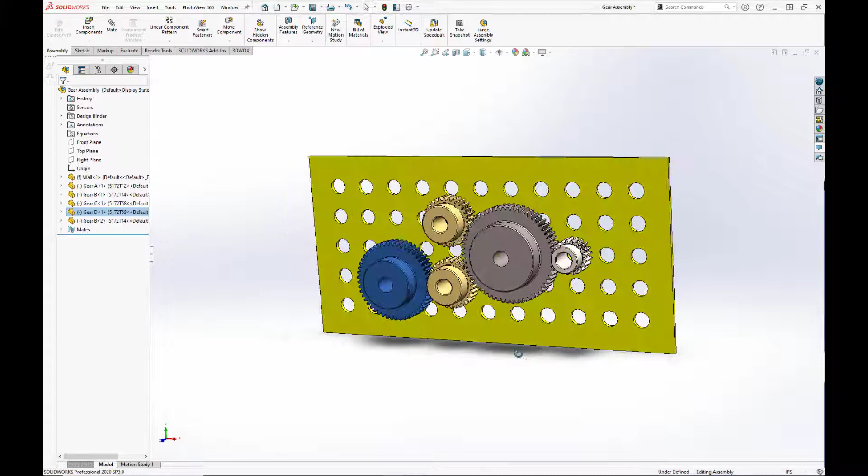The gear mate forces two components to rotate relative to one another, so if you spin one, the other will spin along with it. Here we have a set of 5 gears on a nice little pegboard. As I expand the mates folder, you'll see that the gears are all held in place with concentric and coincident mates.

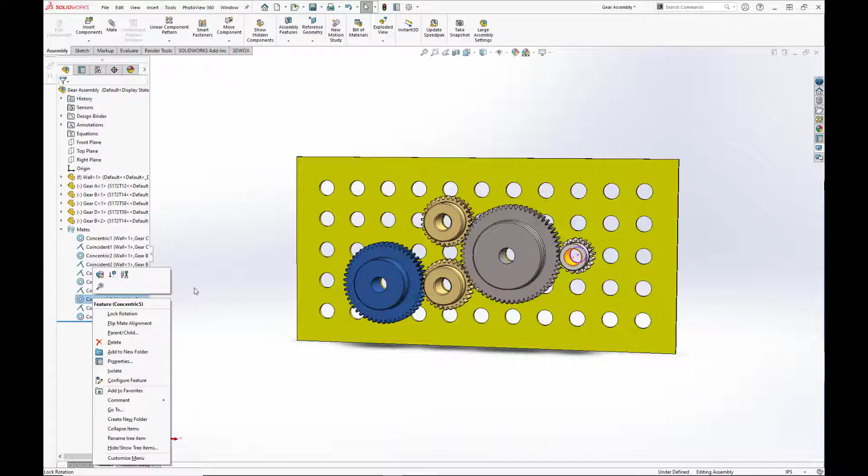Note that the concentric mates do not have locked rotation. This is important because if the rotation was locked, you would not be able to rotate it for the gear mate.

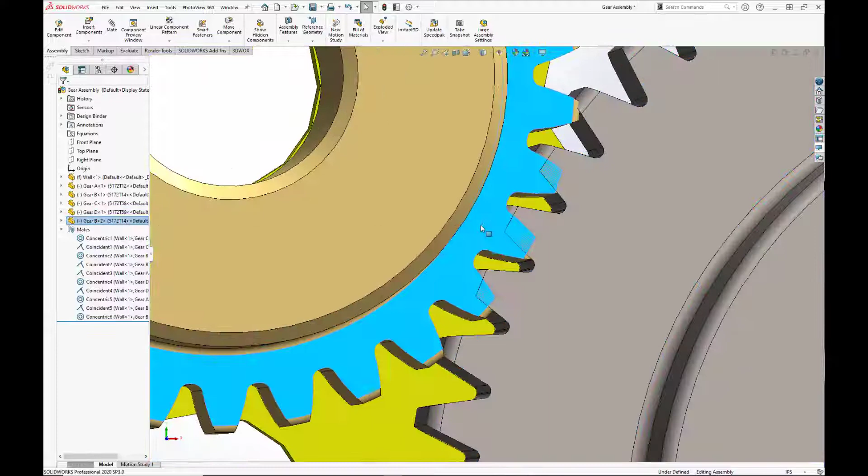The first thing you want to do when creating a gear mate is align the gear teeth to minimize interference. So we're going to go through here and just align these gears to the best of our ability without getting too crazy. And there we go. Okay.

To create a new gear mate, click on the mates icon, expand out the mechanical mates, clear the selection, and select the gear icon for the gear mate. Now select two surfaces that you want to rotate together. Since all of the gears have hubs, we'll select the hub outer diameter. You can also select the center through hole, or depending on how the gear was originally modeled, the outer edge.

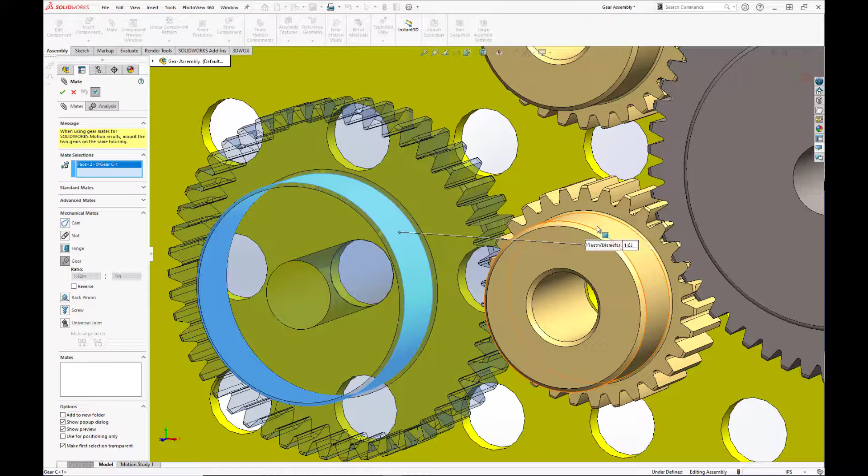So we'll select the outer diameter of the hub of this blue gear, gear C, and the hub diameter for this yellow gear B. Okay. Now you have to enter in the ratio. It's going to guess a ratio based on our hub selection, but we want to actually use the pitch diameter for the two gears. So for the blue gear, the pitch diameter is 2.5 inches, and for the yellow brass gear, it is 1.5.

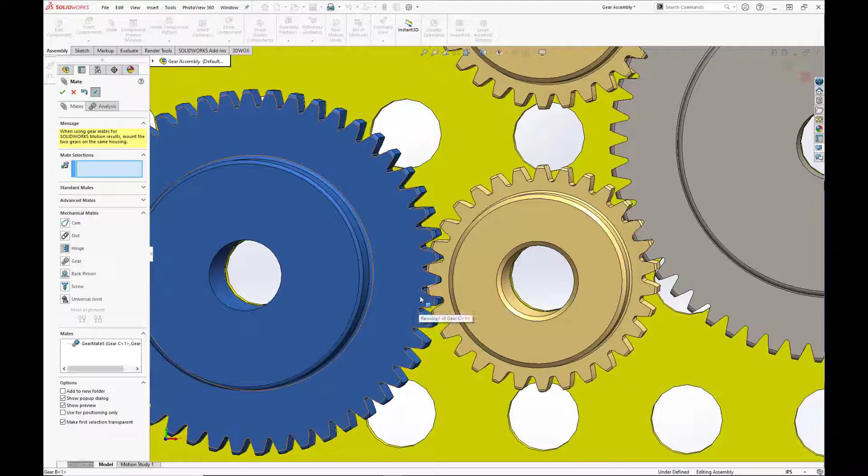I'm going to hit OK, and we'll do a little test. Now as we rotate the blue gear, the brass gear is moving along with it. Let's just slide that back into alignment. The teeth on this large gray gear are slightly oversized. That's why you're getting the interference there and with the others.

Alright, now it is a bit of a rinse and repeat operation, and we are going to mate all of these gears together. So we will select the gear mate and just select them all. Okay. And we're just going to enter in the pitch diameter. So again, for the brass one, it's 1.5. For the large gray, it is 3.

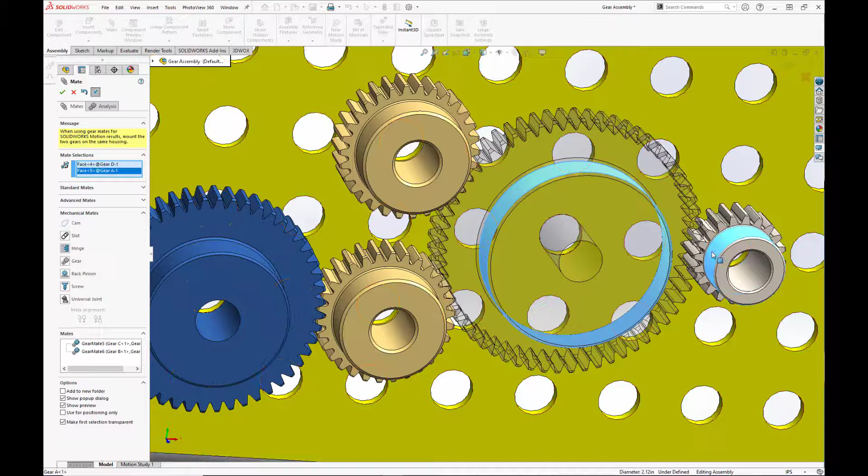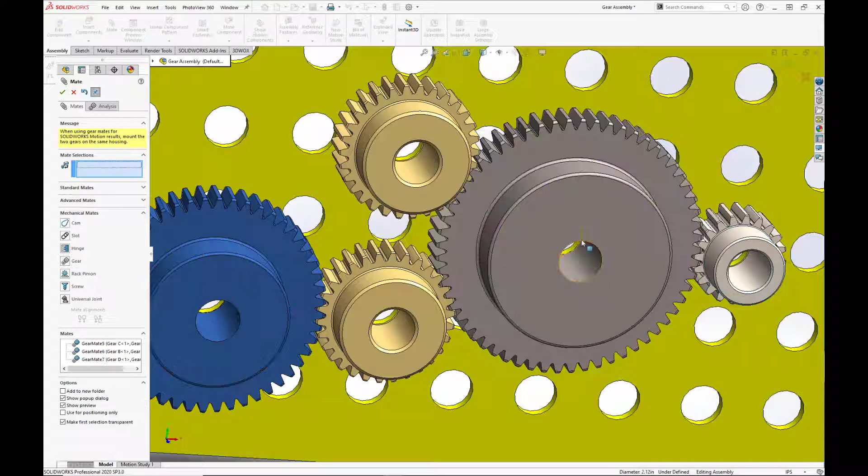Hit OK. Create another mate here, here, gear mate. And for the ratios, the first box is the first gear you select, and the second box is the second gear you select. Just a good point of reference. So this one is 3, and the small gray is 1. Hit the green check, and we have one more.

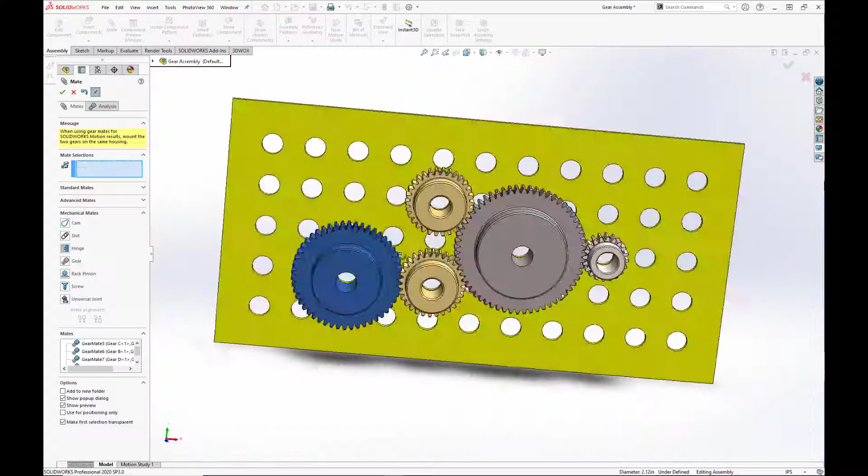There and there. Gear mate. So this one again is going to be 3.00, and the small brass is 1.5. Okay, and we hit the green check. Okay, now all the gears have been mated together, and if we rotate one, they all should rotate together. Let's see how we did. Oh, look at that. That is a thing of beauty right there.

Alright. And just to note, if you should find yourself with a gear mate and the gears are not rotating in the correct direction, you simply just have to check this reverse icon here. And that will fix that.

Alright. Well, thank you all so much for watching. This has been a brief overview of the gear mate in Solidworks. Our next video will go over the rack and pinion mate, which will be very similar to this, only with a rack instead of a gear.